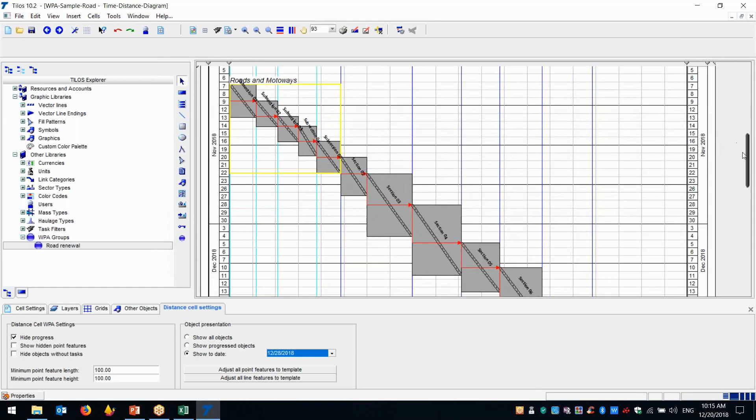You can see these are the construction activities. When you select an activity and go to progress, and enter the progress type, for example entering 10% progress, immediately the color here will change to blue or red, because that progress has started.

So that idea is we enter progress on tasks and monitor our progress from the field. Let's open a new, empty file and create this data one by one, it will be easier to understand. I'm just opening the new file, an empty one. Now I created an empty Tilos file. Let's save this one as Empty. I think this wasn't very empty, so I can delete this.

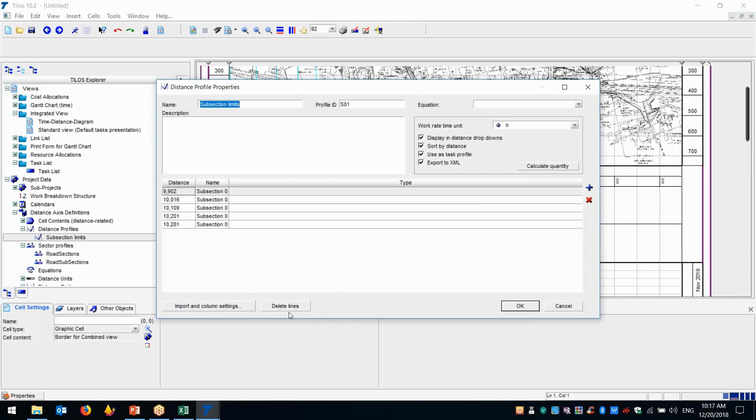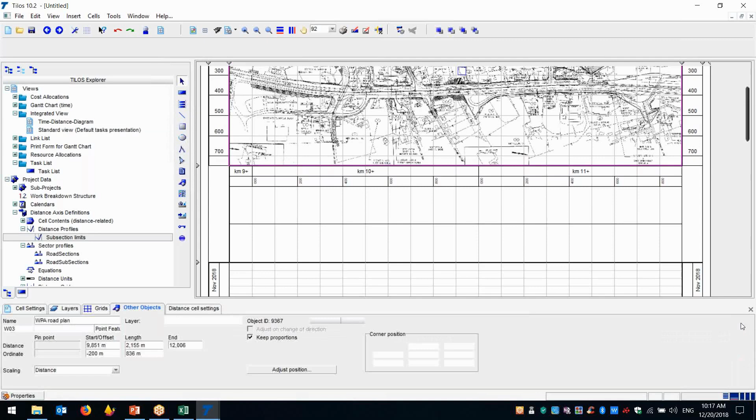Delete also this, and delete also this one. Okay, and here also we select and delete from here. Now let's say I open the empty Tilos file and I would like to guide you step by step how I'm creating the project.

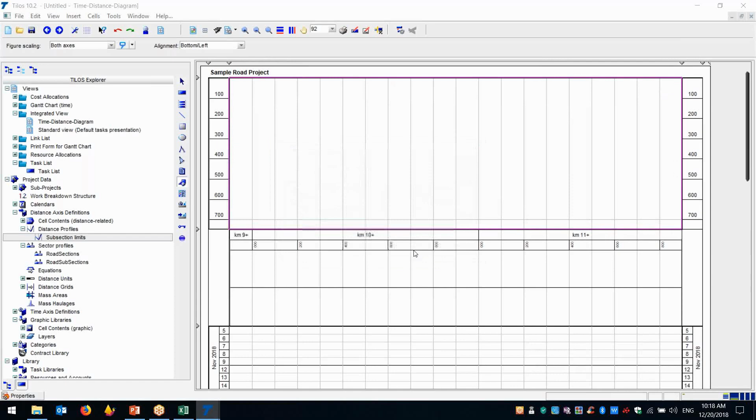Number one, I need to add pictures here, so what I do is the classical method. I select, for example, add pictures, so we enter the pictures the classic way. We can select the file, and when we select the file from here, we just select all files, and here we select the roads, and insert the roads. So this is our pictures. Now I inserted my picture.

I need to adjust my pictures for my project, so I can say okay, this is the distance, and keep the proportions. I can also say, all right, do it like -200, and you can just apply it this way, and have your picture ready here in the system.

I would like to also divide my project into sections, so in section profiles I can select this area from Excel. This is the section profiles, and you know Tilos can easily import this - you go to, for example, section profiles, imports... no, let's say not that one. Here, section profiles, and we import it.

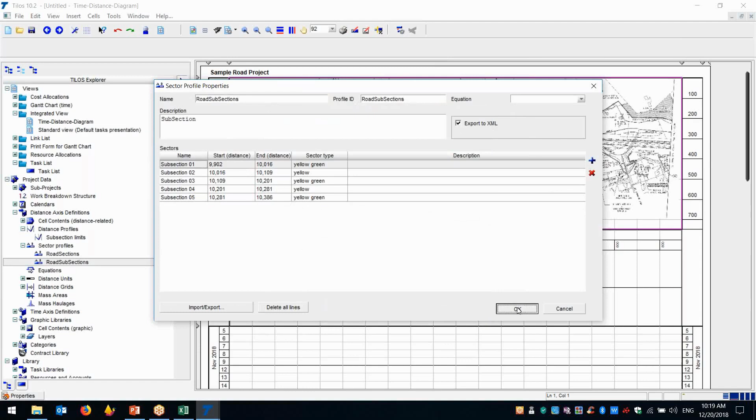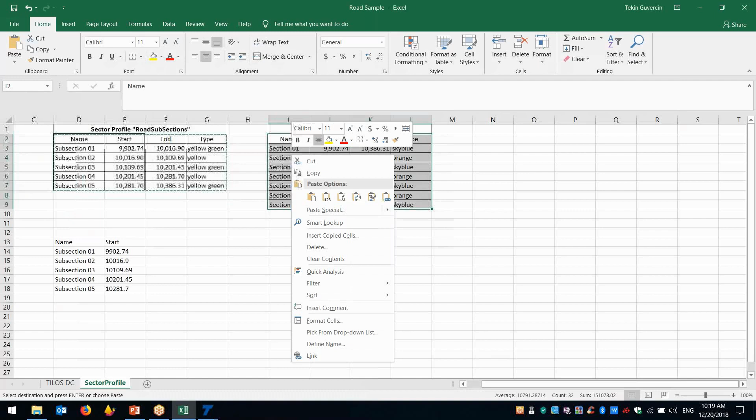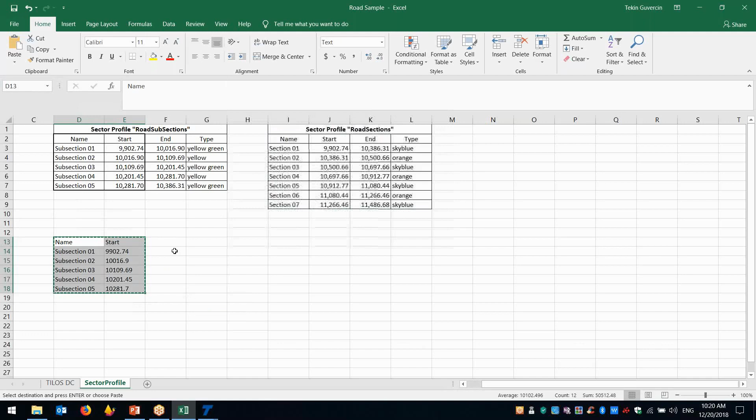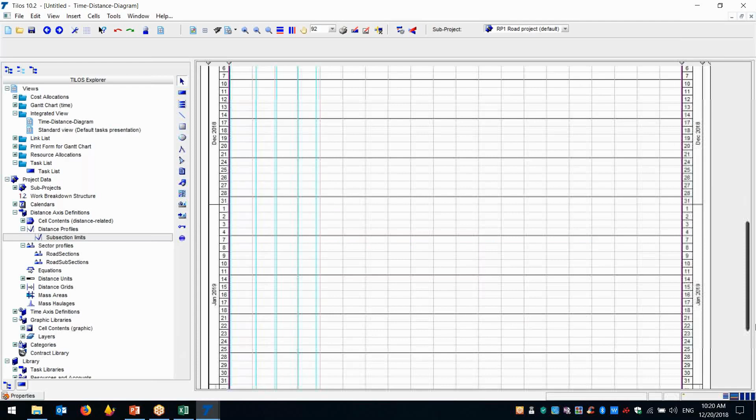Leave it and select. We have section profiles and road sections. We can also go to road sections, select here, copy, and here we have road sections. You can see section 1, subsection 1, 2, 3, 4, and we can also select those and put it here, subsection limits. Let's do 0, and you can see we have subsection limits, and you can just make the lines here. So what I did now, I created my project information lines, project section, subsection, and imported my project map.

And you can see we have a new function here called adding points, so you can mention that we are going to have new points here. You can enter new points, and you can enter here, let's say, another point, and create a line, which we call a new object line.

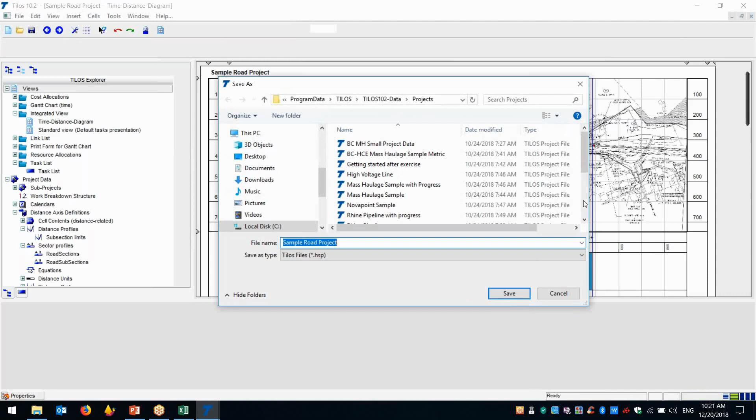I don't want to take too much time creating one line for each section. I have already created this code here, let me just open it because it takes some time. And here, I created this one.

Now you can see this is the one which was created. You create a line by entering the insert points feature. The second one is from section 2 to section 3. The third one is section 3 to section 4. You can see that in each section we have created one line.

And now you need to enter the activities, so we can just select and enter the first activities here. Okay, you can just draw it as an activity.

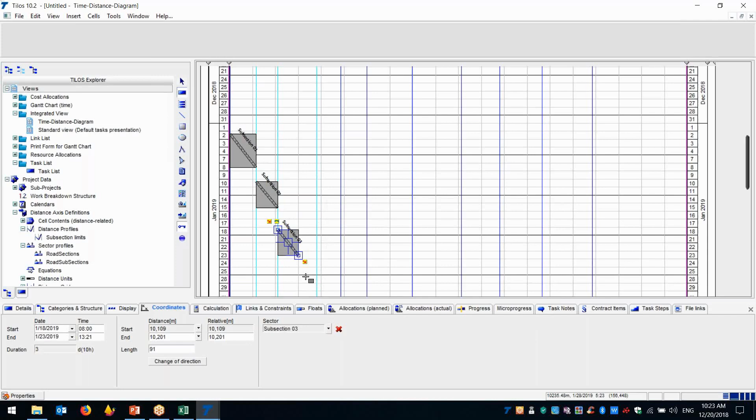From here, when you enter the activities, you can also go to coordinates. From coordinates you can say, okay, this is for subsection 1 activities. Second activities, we can also register here, and say this is section 2. Third activities here, you can say section 3, subsection 3. It's automatically applying it. You can also register here another activities for section 4 and another activities, and have it here subsection 5, so I have created subsection 1, 2, 3 activities.

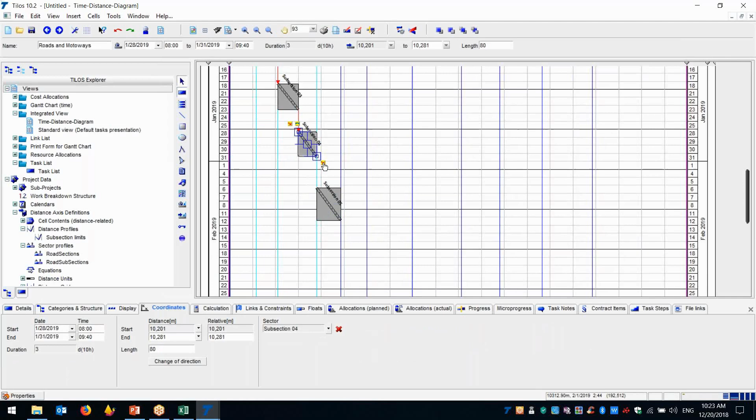And I can link those activities so that this one will finish, this one will start, this one will finish, this one will start, and this one will finish, this one will start. As you see, this one will start, so I have created the link here. I can schedule it. You can see all of them are finish-to-start relations, and it's created this way.

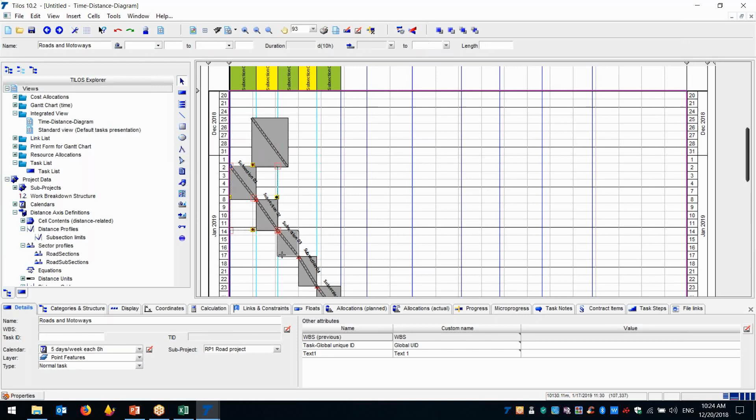You also have the possibility of entering other activities here, for example for summarizing. So you can just add another activity here, let's say this is the summary task. You can create a summary task, and in this case select those other activities and insert them inside the summary task, and now it's one activity. But if you want to see the details, you can just press and create it.

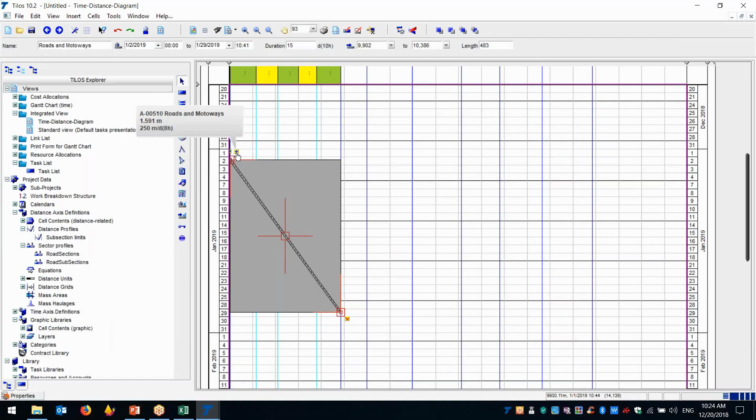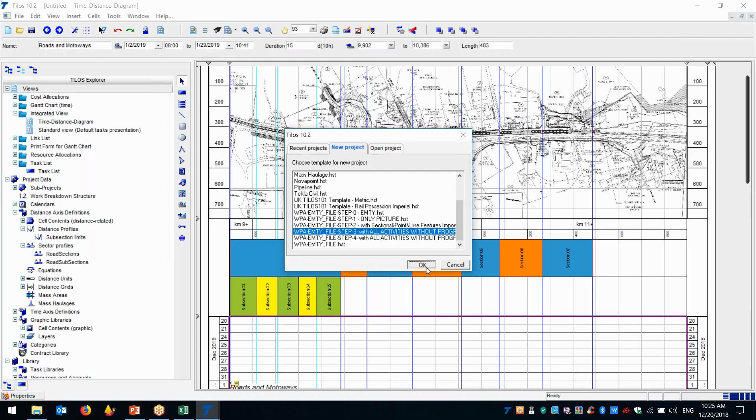And now this task, when you create it, let me just also create the others, and you can add a second, third one, but maybe let's not lose time entering this. I can open, for example, here already added activities - let's say I open again a new file, which already has all activities created. All right, so let's go here.

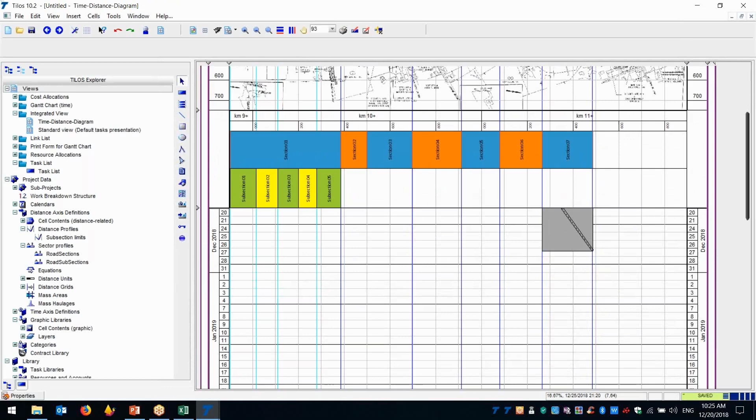Okay, so these are the samples which other activities already created. We don't see all tasks because the view is starting from December, so I need to change the starting dates. Let's say April 1st.

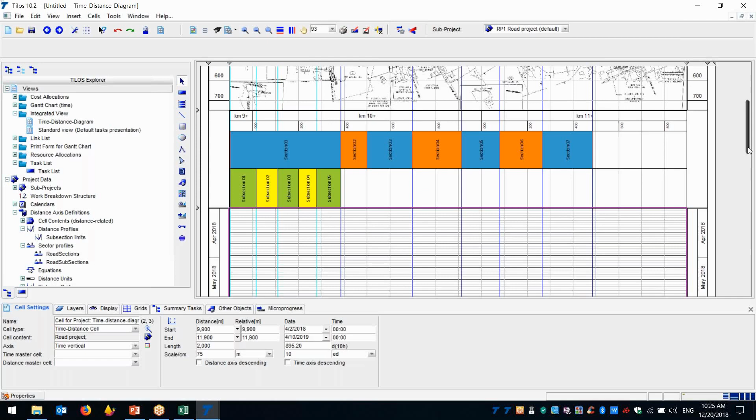Let me just check. Yeah, here. Maybe I can start it from not April, but October, let's say. All right, so I select it here. October 1st. Okay.

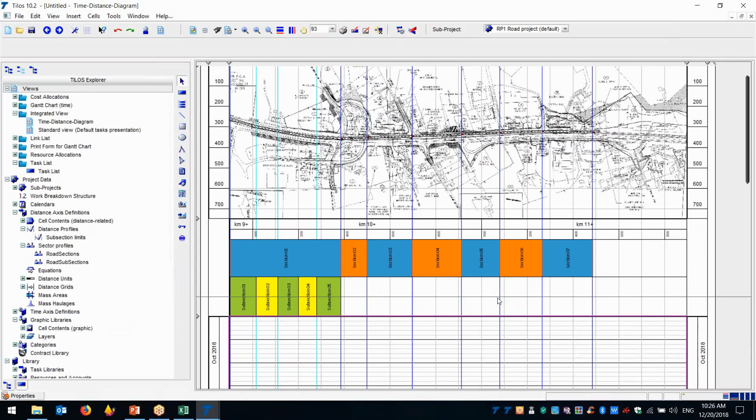Now I have also a task here shown, sorry, in the wrong file. Let me open it one more time. Probably I'll close it. Okay.

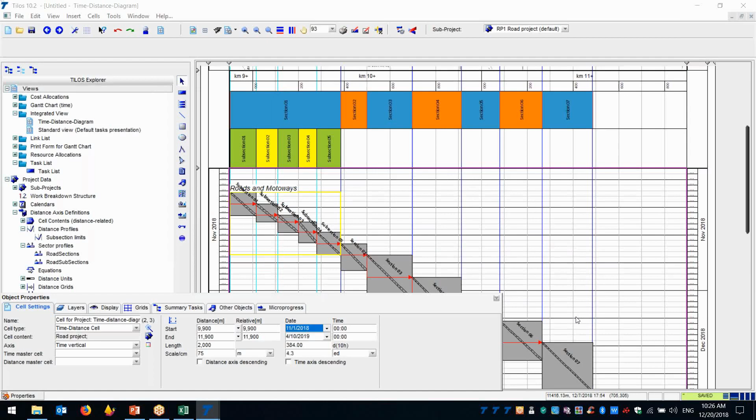All right, I created again for the file with the loaded activities, so we are from here. I'm just saying, okay, just show me two activities starting from 1st of November. Okay, so when you enter all your tasks, you can see that your project activities are going to be like this. Of course, I was creating a finish-to-start relation.

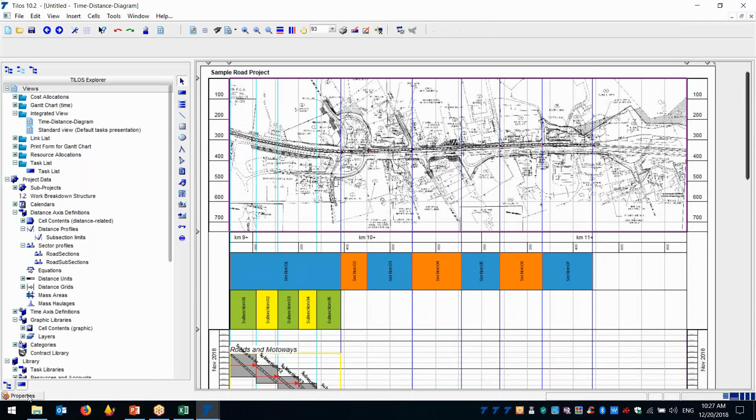Here I have another relation type. When the first activity reaches 50% progress, then the second activity starts. Okay, so now I would like to show you what I was showing at the beginning.

So when you go to distance cell settings, you can say show my activities, and see how it looks, all right? So when you have 8th of November, you can see that because your activities in 8th of November are starting, the planned date is showing the activity on top as red. It means that this activity is in progress.

When we have the 15th, this activity has more than 50% progress. When it's the 22nd, this is still more than 50%, but this activity is also starting. So these are the planned dates you can have.

Okay, but what about if you don't want to have planned dates and would like to show the progress? I selected the progress periods, but when I select the progress view, you can see there is no progress here. Why? Because it's taking the actual progress.

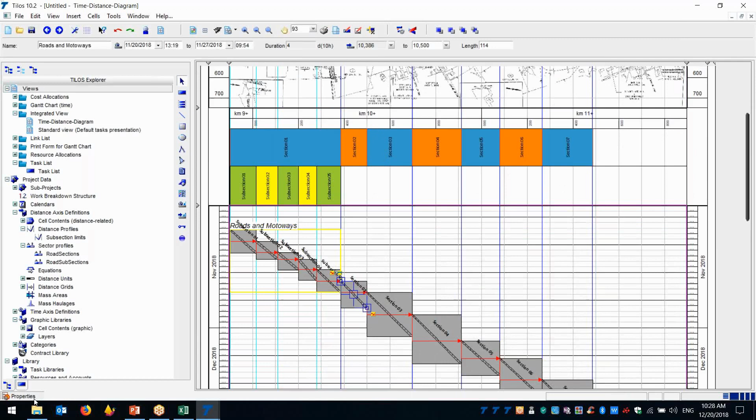So what I need to do, let's say I select this activity, section 2, and open the activities, all right? And go to my activities progress, all right?

And from the activity progress, I can just enter that this activity has 50% progress. When I select this 50% progress, please see that my activity line here, section 2, turned the color blue. If I write it here again for this activity,

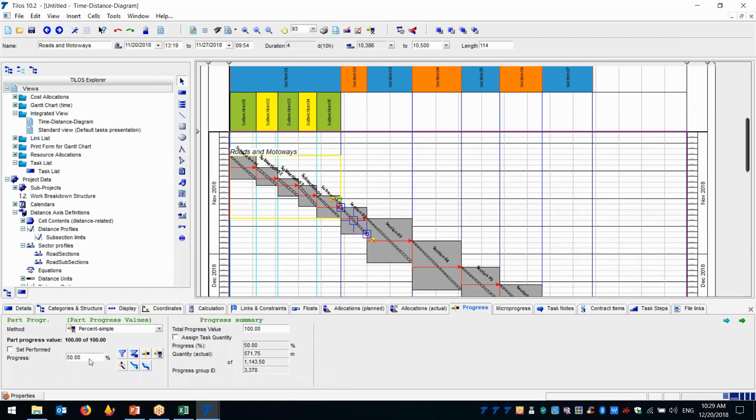75%, and you can see that when I write it as 75% and press enter, okay, it's showing blue. When I write it as 100%, the activity turns green. It means that when I enter the progress on my task, the color of the line automatically changes. All right?

Do you have any questions? If you have any questions, please type them. But our idea is that we are now entering progress on tasks.

With the new Tilos module, work phase assistant, we can display the colors. So let's select the second activity. And when you select, for example, by the way, you don't have to go to the task. I select the line and select the task, and it automatically selects the task.

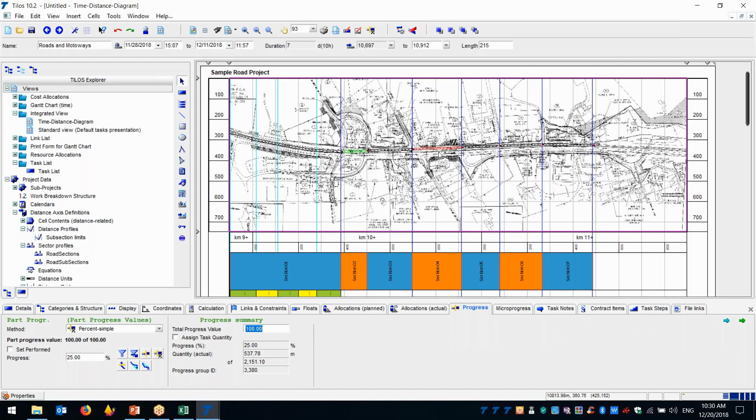And here we enter the progress. Let's enter simple progress. Let's say that this is at 25%. You can see that the color moved to red. If you write 50% here, the color moves to blue.

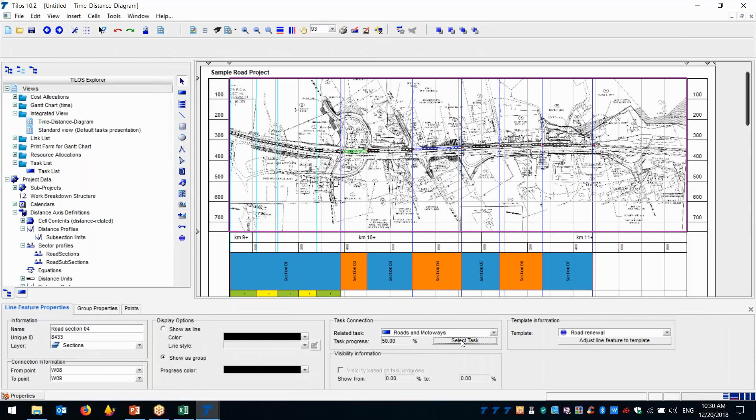And if we write here, let's say, 100%, the color will be green. This way, you can see which activity is completed, which activity is in progress, and which activity is not started. All right.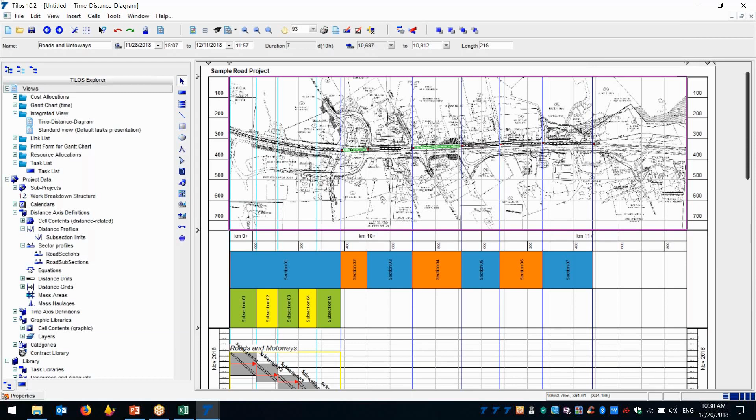As a final one, let me show you how it looks. You can also do very valuable things, like opening, for example, planned versus actuals in 2 screens, and you can see that this will be an excellent presentation for your project team, showing that this was planned to have completed section 1 and section 2.

It's showing that section 1 is not started yet and section 2 is less than 50%. Okay, and here you can see that it just gives the comparison, and on the date, which you can go here.

So here, for example, on the date we can go to, and when we select, for example, here, December 6th, you can see that the plan was to complete this work, but we didn't start it yet. So you can just select and immediately compare planned versus actual work.

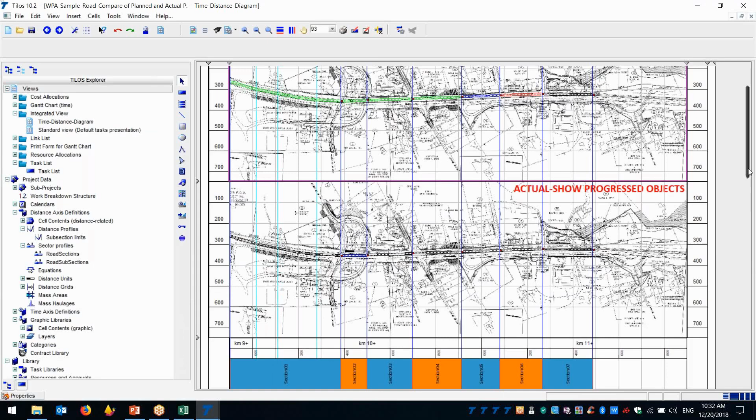Work phase assistant is a new module of Tilos, already available for Tilos customers. It works together with the Tilos license, it's not a separate license. It's a plugin like the Primavera integration, Microsoft integration, or Excel integration, so if you have any more questions, please let us know.